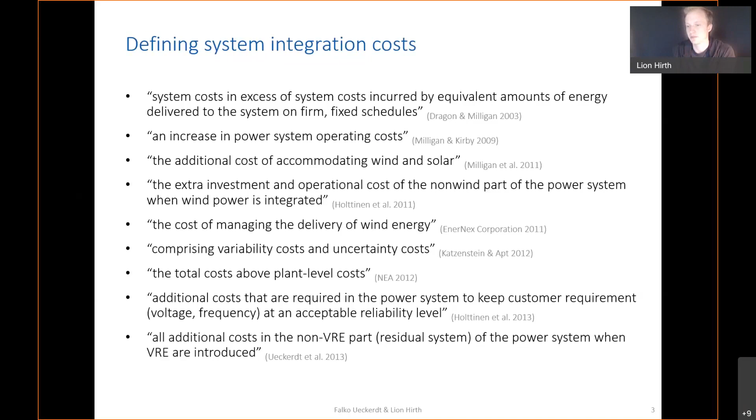So we want to talk you through our view on things. We will start with what we call the value perspective and turn to the cost perspective. We will discuss the equivalence of both, and then focus on something we've spent quite some time thinking about, a phenomena that we call profile cost and the utilization effect, and then generalize that line of thinking and discuss the components of system integration costs. We will close with some recent quantifications and an outlook.

So obviously, for any economic assessment of any generation or consumption technology, you need to know when that asset is running. One way of studying this is what we call the market value, which I define loosely as the average wholesale revenue per megawatt hour. I here think about zonal electricity markets that don't have spatial granularity, in contrast to American LMP markets. So let me define market value as the average revenue per unit of generation.

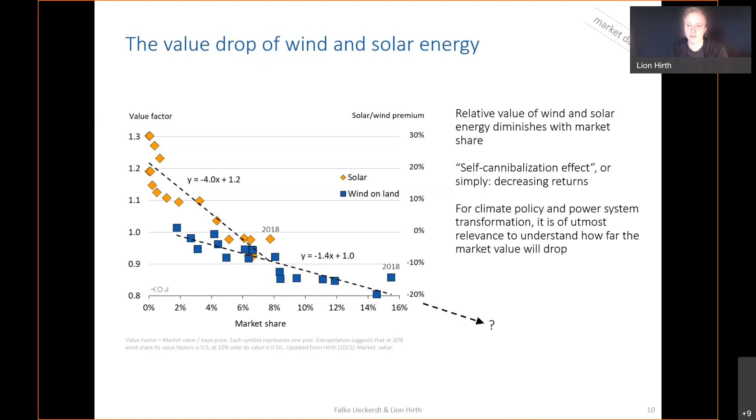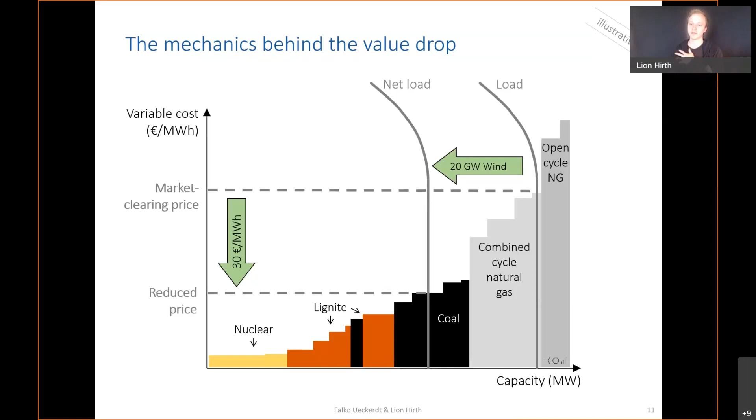So there's nothing magical here. That's simple, very simple demand supply economics. And we are not the only one observing this.

And funny enough - that's coincidence, no magic rule - but I get almost the same number as I got two slides previously looking at German data. So empirically, we find stark patterns here.

But of course, these empirical assessments have limitations. The observed market value is not an underlying fundamental marginal economic value because we're looking at observed data. And real electricity markets are incomplete. Take the German example: we have zonal pricing, meaning network constraints within Germany are not priced. Obviously, that means observed prices do not reflect true economic value.

Also, distribution network constraints are almost nowhere priced properly. Externalities are not priced - climate change, local pollution, and many other externalities are underpriced. And real-world electricity markets are often out of equilibrium.

We are undergoing a massive system transformation with huge oversupply across Europe. We have massive business cycles, pandemia, downturns and upturns. So certainly any observed number is not a long-term equilibrium of electricity markets. I just want to put this out as a warning sign because many, including myself, in the past have maybe put too much emphasis on observed data and interpreted this as true underlying economic value.

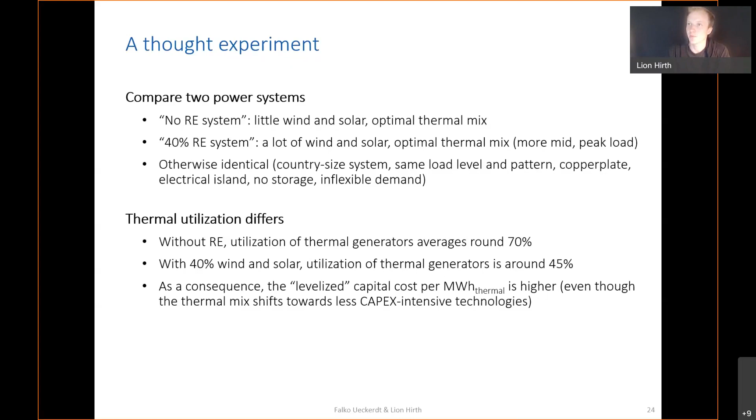Because thermal power stations are costly to build and embody a lot of capital costs, the levelized capital costs—that is, the capital cost per megawatt hour of thermal energy produced—is much higher in the second case. That's true even though there's a shift in the thermal mix: the second case has much less capital intensive gas plants dominating, while the first case has more capital intensive base load plants dominating. But because we use that capital much less, the per megawatt hour capital costs are higher.

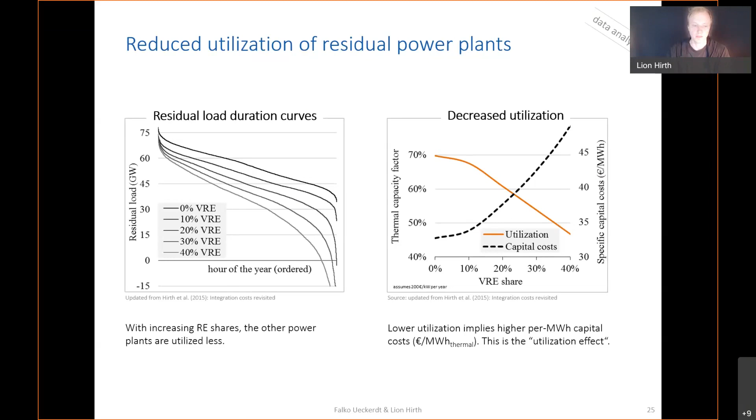As a consequence of this, we define that property, the utilization effect, and from it we define what we call profile costs. We use the term profile costs because it's a result of the time pattern of renewable generation only. This is not about uncertainty, not about forecast errors, not about grid constraints—none of that exists in our thought experiment. It's just that the time pattern of generation, the fact that wind sometimes blows and sun sometimes shines and otherwise does not, causes this effect.

The thermal utilization effect I just mentioned is maybe the least obvious one that matters here. There's a similar effect you might call the renewables utilization effect—that's curtailment as a consequence of oversupply. In times when more electricity is produced by wind and solar than there's demand for, some of that electricity needs to be spilled, and as a consequence, the per megawatt hour costs, the levelized cost of capital for renewable generation, goes up compared to the no-curtailment case.

Finally, there's something you might call the flexibility effect, which has received a lot of attention, in particular from engineering colleagues. That's the cost associated with increased ramping and cycling of thermal plants, so startup costs mostly. Those might tend to go up as well, because a high renewables system will require more cycling and ramping.

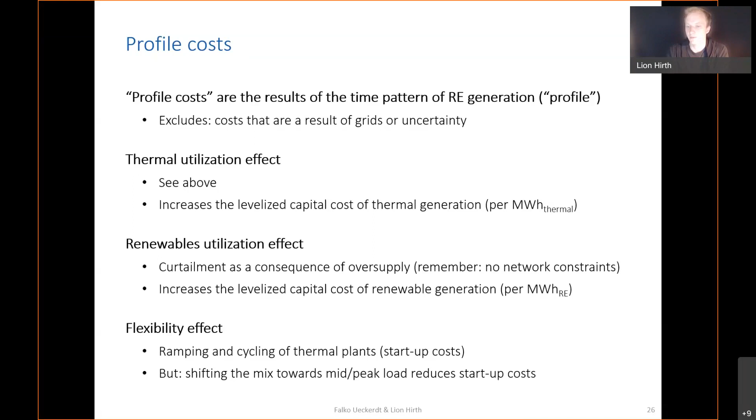But I want to be cautious here, because if we compare two different thermal mixes—of course if you start up a coal plant a lot, that involves startup costs. But if you shift from coal to natural gas as the major fuel in your power system, natural gas-fired power plants have much lower startup costs. So overall, it could well be that the flexibility effect yields a negative sign in the end. That depends on the precise parameterization here.

Let's take a step further and try to do something holistic and comprehensive regarding the different cost components of integration costs. I want to start with a few fundamental, but maybe also abstract, notations here—and you'll realize I'm an economist by training when I do so.

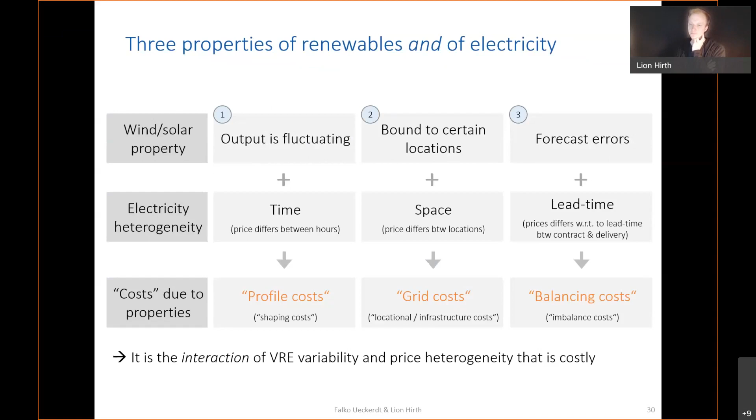I put up this slide just to emphasize one more notion: it's the combination of the properties of renewables and the properties of the power system that causes these costs. It's neither one nor the other alone - it's only the interaction between those two.

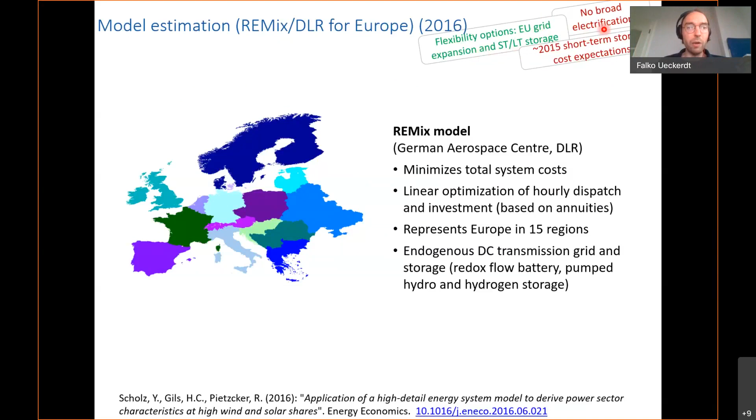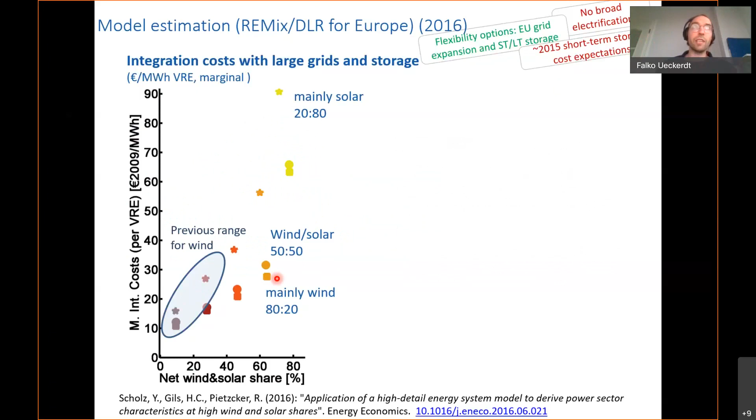A bit later, this is a model estimation with the REMix model of the DLR. They already consider flexibility options like large-scale EU grid expansion or short-term and long-term storage. However, there was no broad electrification yet, and the short-term battery cost expectations were from 2015. They already show that compared to our previous range, the model analysis gives much lower integration costs. However, for solar-dominated worlds in Europe, integration costs can become very high due to the seasonal mismatch of solar and demand.

Also confirm that profile costs are the biggest component.

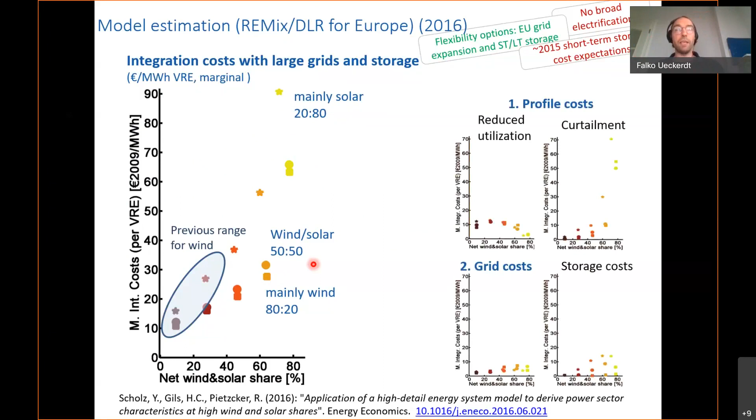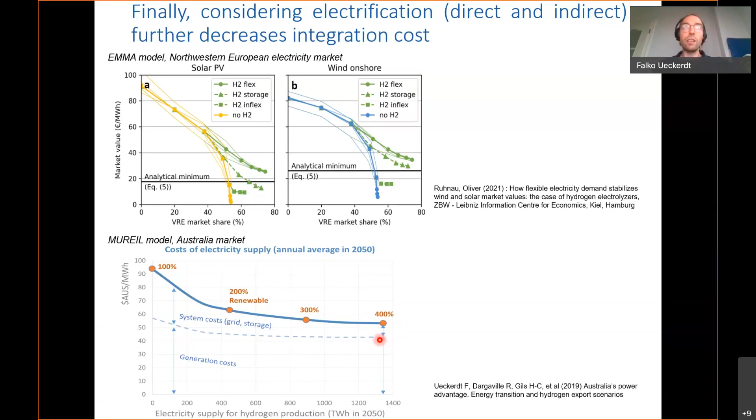So if I carefully conclude, I would say that in combination, flexibility options of all kinds and CO2 pricing will likely stabilize market values and integration costs, such that there are no showstoppers to very high wind and solar shares. With this, I point you to the core four papers, which are the conceptual core. Thank you very much for your attention.

Thank you, Lion and Falko, for the very interesting talk. I think you gave a very clear elaboration on the value and the cost perspective and their equivalence. It's also always interesting to get some quantification, in this case for wind and solar PV.

So let us move to our second presentation, where we will focus on the work carried out at NREL, also connected to IEA Wind Task 25. We regret that Michael Milligan was not able to join, but we are very pleased to have Juha Kiviluoma with us, who was also heavily involved in these approaches. Juha is a principal scientist at VTT, the Technical Research Center of Finland, and is also part-time senior energy systems researcher at University College Dublin. He has wide-ranging interests in electrification of energy, flexibility, energy systems planning and operation, as well as tool and method development. Juha will present some of the NREL work on the subject, more specifically on system cost and the aspect of cost causation. So Juha, you have the floor.

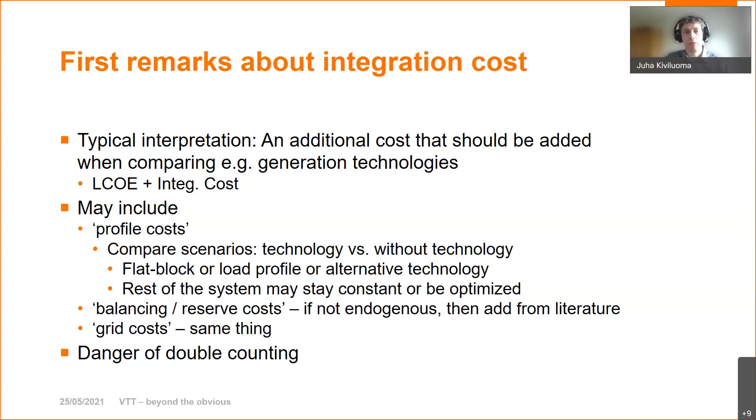There is a danger of double counting across these different categories, and there's lots of discussion about that as well, but I just don't want to go there in this presentation. I want to focus on a couple of key points I want to make. So let's go towards those.

First, I have a very simple case study. The first slides are without investments. It's a system with power and heat. Both are a single node. I'm looking only at profile cost because that's sufficient to make the points. I'm looking at the operational costs of different scenario runs.

And so what I'm comparing against is a flat block generator with zero operational costs. I did this using IRENA FlexTool. It's quite fast to do something like this using this tool. And of course, reminding that the absolute values I'm presenting here are not really the relevant ones. They are driven by the assumptions as always, and here the assumptions are rather simple and just serving the purpose of making the points.

So in the base scenario, there is 10 terawatt hours of electricity and the same amount of heat loads. There are only a couple of different power plants: condensing coal, a gas engine, wind, PV. Then for the further cases, there's batteries, but not in the base case. There's an oil boiler and heat pump.

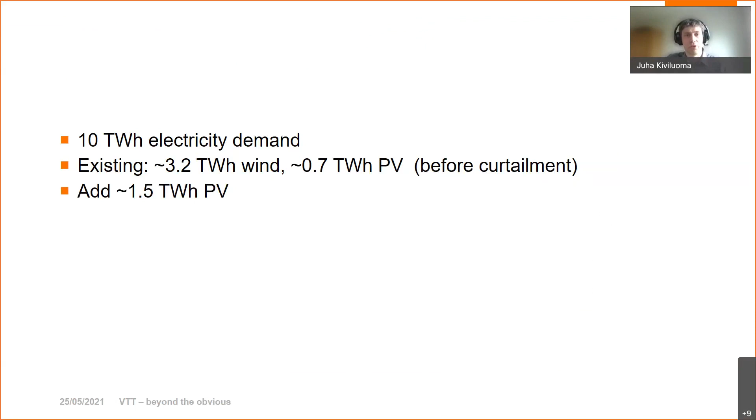So we have that 10 terawatt hour demand, and then I have an existing 3.2 terawatt hours of wind and 0.7 terawatt hours of PV. These are before curtailments, and then I'm first adding a little bit of PV, 1.5 terawatt hours, or 15% of the whole load, maybe not so little. What I see, if there is no battery in the system, is that the PV profile cost is still 12.6 euros per megawatt hour against this flat block generator.

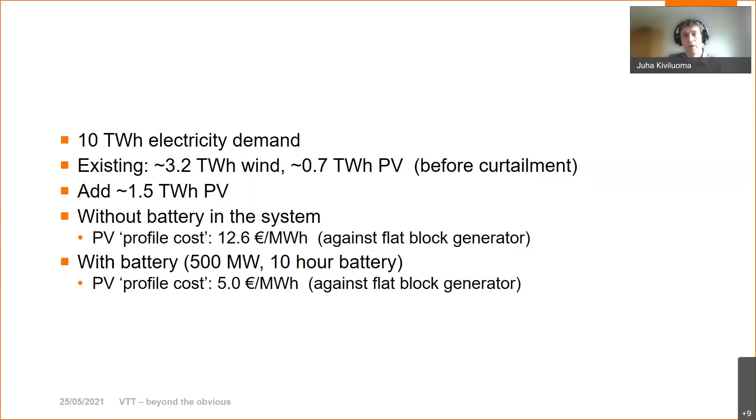When the system has a battery, 5 gigawatt hours of battery, the profile cost goes down to 5 euros per megawatt hour. So, of course, the first point about this is that the integration cost is system dependent. I don't think this is a surprise to anyone, but we have to bear that in mind, that it's a value that shouldn't be taken out of context because it is very sensitive to the system you're looking at.

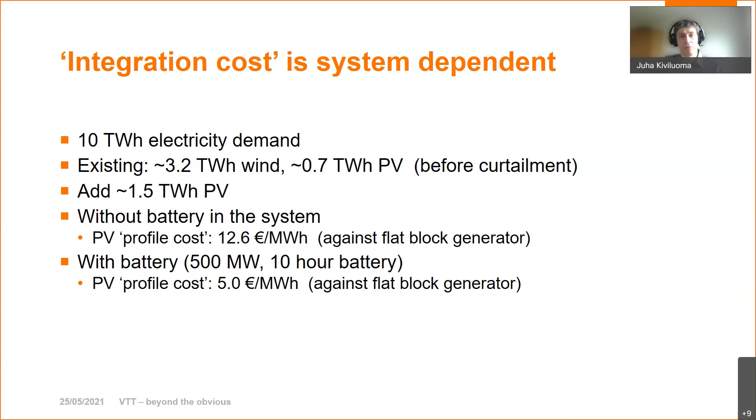Then moving onward, and maybe laboring this point a bit further, there is a system A here. It's the same one we started with last time, and it's about 38% VRE. Then we move to the next system by adding 1.5 of wind, and we see an integration cost of 1.7 euros per megawatt hour. From here, we add also PV, the same amount, and the PV sees an integration cost of 11.4.

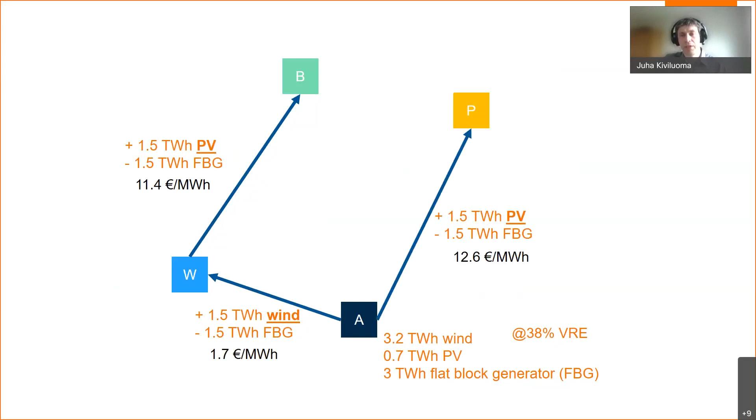However, if we take another route, going again from A, but now this time to the P system where there is PV directly, we see an integration cost that is different for the PV in this case. Same for wind, and this is even more so if you look at the relative values of the integration cost of wind in these two different tracks leading to the same point. We see more than 3 times difference in integration cost. Of course, in absolute terms those are pretty small, but this is just trying to make the point that it depends on which one you think came first. And this starts to get into some of the trouble I want to highlight.

Yeah, this ends up as 64% VRE when considering also curtailments.

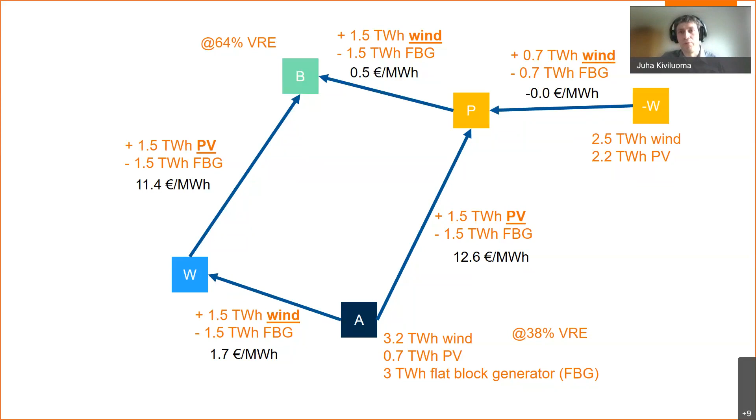Then just maybe the point that was already made by a previous presentation, but when we add wind, it can sometimes be that - or whatever generation - but in this case, wind has a slightly negative integration cost when going from this minus-W system to the P system. And then also another point is that even though the PV integration costs were very high here, we can also see that they are not necessarily high. If we start from 0 and go to 0.7 terawatt hours of PV, then the integration cost is not very high, and that's of course because there is more value here in Finland. But as you go to higher penetrations, the value of PV gets into trouble because of the poor correlation with load.

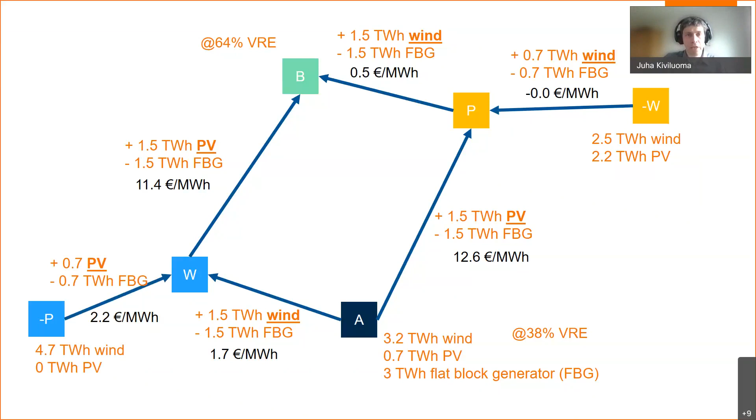So going a bit further again, now I have a system AB that has not just wind and PV, but also this battery, and I add wind to that system, and I see a relatively small integration cost. The battery has flexibility and helps in wind integration, and there is a small integration cost there, or so-called integration cost.

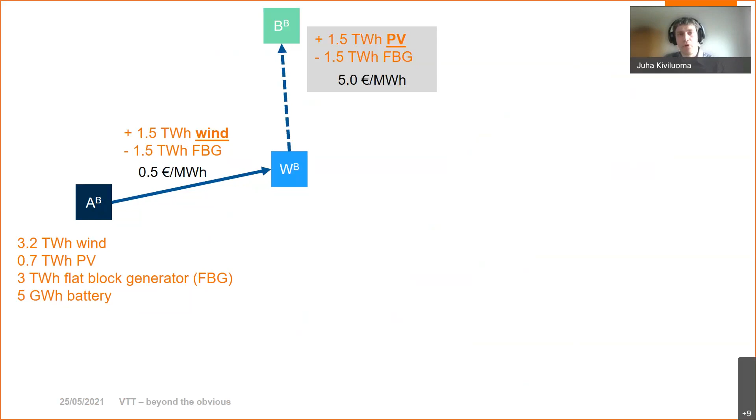But when I add PV to this system with battery, even though we are already at quite high levels of VRE, the integration or profile cost - sorry, I'm using them rather interchangeably - but anyway, it's €5 per megawatt hour in this case. But what happens if this WB system changes? Let's say the battery catches fire and it's no more. There is an overall increase in the system costs because of this.

But what if we now add PV to this system? Then we see that the PV in this case has an integration cost of 13.4, which is way higher than that 5. And I just have a hard time attributing this change to PV because it was the system that changed. So I'm trying to get to the point where I can say that there is an attribution problem.

Who is to blame for these so-called integration costs? Should it maybe be instead of that PV, that the wind was just built before? Or maybe it should just be the next plant you happen to build. What if it's a 5 kilowatt PV plant? Then it will have a rather high integration cost if you attribute it to that. Or should it be attributed to the load? Because in this system, if it happened to be very variable and the battery was kind of thought to be built to mitigate against the load variability - of course, we know that's not the case. The battery goes there because the system benefits from it.

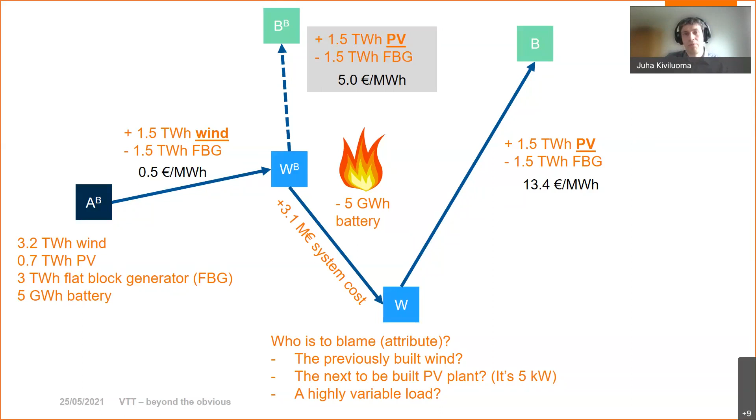So I'm trying to say that this is a system of dependencies, and there is no way to fairly attribute who is to blame for what. These changes accrue over time, and even if you do a marginal change, the latest change to the system will over time be stacked over by new changes, and it will become very difficult to attribute any cost to that anymore. I am trying to say that it wasn't clear in the first place.

Let's have another case study with investments. So I'm using the previous assumptions. This time I'm forcing a certain amount of VRE into the system after curtailments, so really building that much, that you get that much generation from it.

And the integration cost this time is a bit different. It's the total system cost before and after, so the difference from when increasing the VRE, we can see how the cost changes, the total system cost. There is 10 terawatt hours electricity and same heat still.

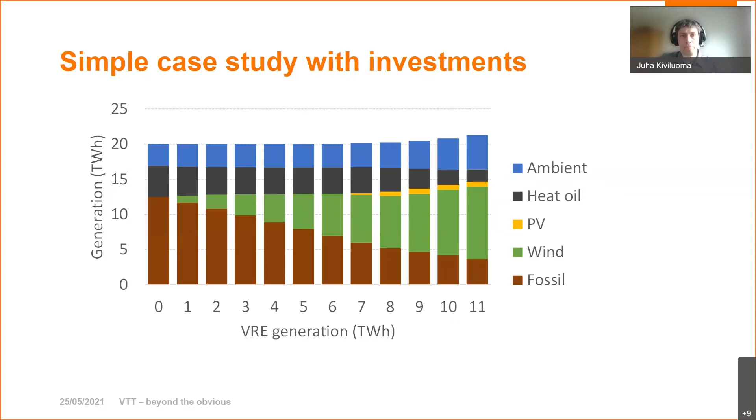So that's nice, fun fact.

Let's then take the heat sector away, and we see that the total system costs when we are forcing the VRE to produce all the way up to the full 10 terawatt hours that there is electricity demand, there are huge costs in integrating that to the system. We are kind of saying that you can't produce anymore with fossil in the last point in the graph, and therefore you need to do it all with wind, PV, and batteries, and that's of course very expensive, and you see that happening here.

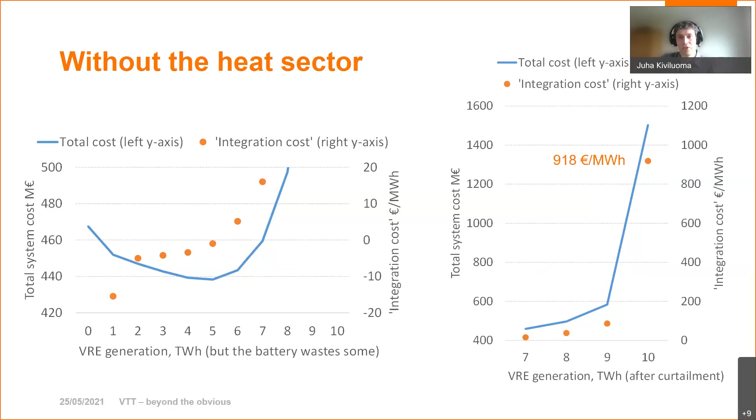I guess what I'm trying to say here is it's the same point, that it's the system that matters, and your assumptions about the system boundaries are going to be very, very important when considering whether you use integration cost or not.

Another point is when you change the CO2 cost, which in the base case was 20, going up to 50, you see how the optimal point goes from 7 terawatt hours closer to 9, and also the integration costs drop consequently. So the system matters again.

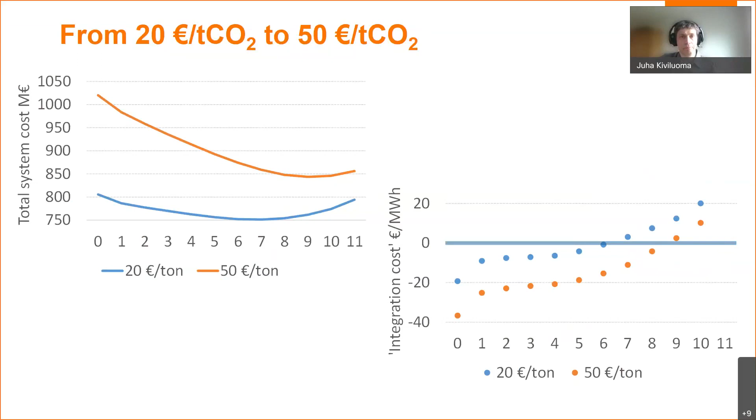So what I really want to say here is that certainly I'm not trying to say that variable power generation doesn't cause challenges to the system and its value to the system wouldn't decrease. Of course it does, but I'm just trying to say that it's not productive to try to calculate that. Maybe that's too harsh a way to say it, but I guess I'm trying to defend the position here.

I think it's more productive to talk about the total system cost and use that as a measure. I think it's much less misleading, because when you're reading about those results, you can immediately see that it's the whole system that matters, and you can direct your attention to ways you could find solutions to decrease those total system costs and achieve your objectives with least cost. I also think it's easier to discuss assumptions and methodologies, and to focus the discussion on those things rather than on how you calculated the integration cost.

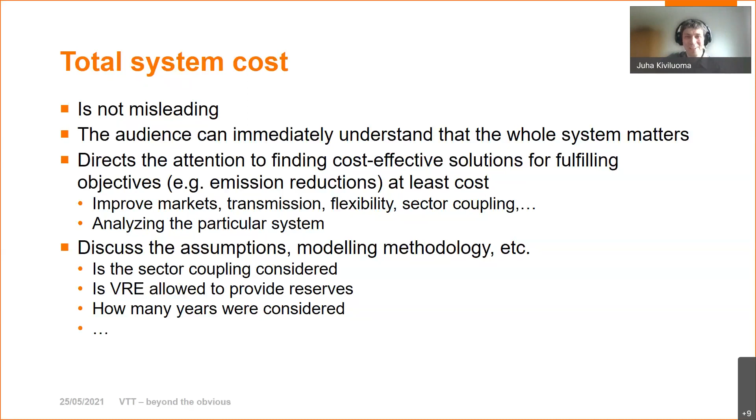So still, that said, there are some costs that are not always covered by the modeling methods in use. There can be ancillary service balancing costs, especially within the periods that the model covers, grid costs and so forth, and those should of course be included in the modeling as much as possible. If they are not somehow included, then try to at least be conscious of them and present the results by saying that those are not included. The same goes for the system boundaries, what you've considered and what you haven't.

Then a point about LCOE, I find it difficult because it of course depends on the full load hours you actually get. This is especially true for thermal. Therefore I see it also as kind of a system property. I know there was already a presentation on how you can try to piece them apart, but I still kind of think this is maybe my point of view on that topic.

And the same is true with market price evaluation, especially when you're looking only at the short term. I think in the previous presentation there was quite a lot of talk about long-term market value, which is a different thing. But if you're looking at short-term, you don't have any information about the investment cost in those prices. It's of course very important for an investor to evaluate those, but when thinking about the optimal system to decrease emissions, I don't find it so interesting.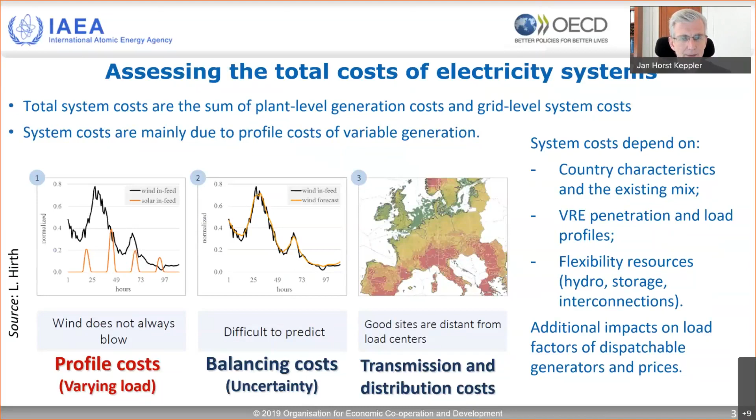And you have the system costs increase. Perhaps that slide also gives you a feel for there being some system management issues, some technical issues in the working of the system. We have not really mentioned them yet today. We have not modeled them.

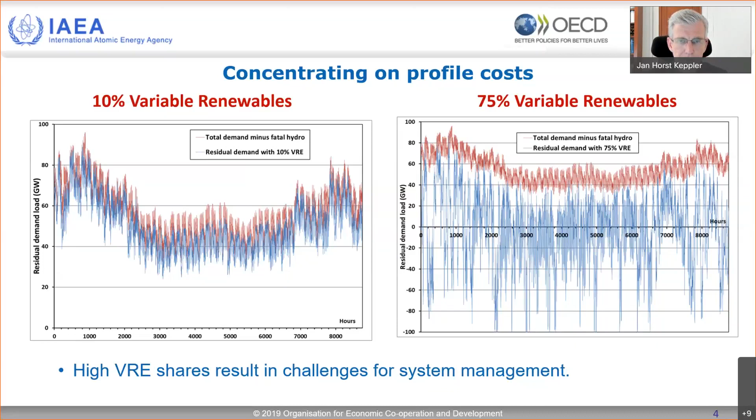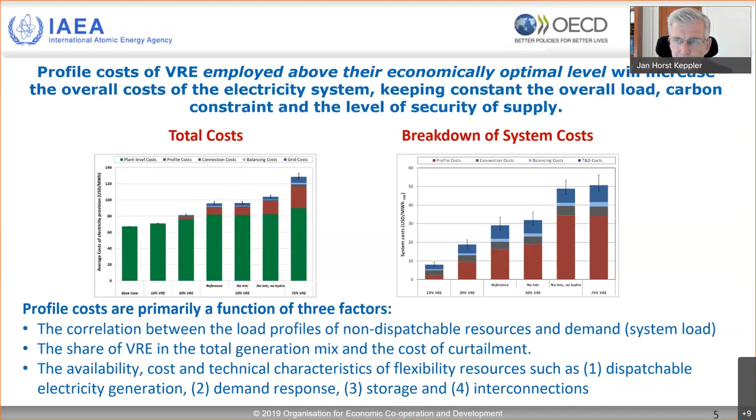Yes, and I should have said it's also a function of the carbon target.

System costs are very different whether you're looking at a system with 50 grams per kilowatt hour, which is already a very nicely decarbonized system, whereas in Europe we're currently between 300 and 400 grams per kilowatt hour. So getting it down to 50 grams per kilowatt hour in the European context would be a great success. It's roughly the level of a country like France, with its high share of nuclear, but you also have other low carbon energy systems such as Norway with its hydroelectricity sources. So 50 grams is already very ambitious.

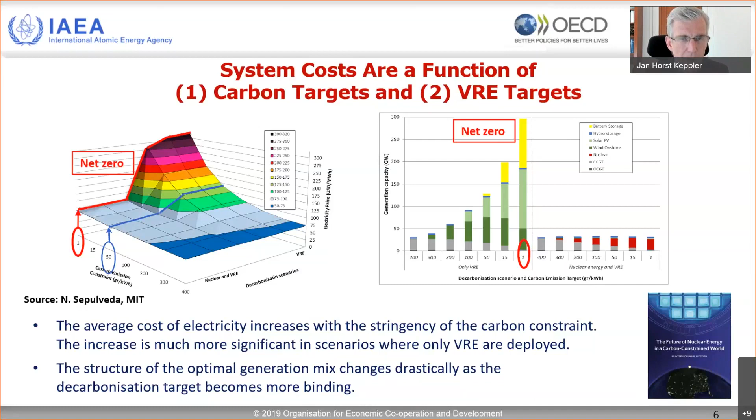You see it also in the right-hand graph. The column there in the middle corresponds to the same 1 gram per kilowatt hour. Again, you see how far the costs rise for a low carbon target and a high renewables target. So that combination, for us who are in the business of giving advice to policymakers or providing information to policymakers, is a very important message.

Autocorrelation effect, because all the wind turbines produce during a limited number of hours, where they then push down the prices. All the solar panels here in Europe produce between 10 o'clock in the morning and 3 o'clock in the afternoon. So again, during those hours, prices tend to be low, and that's why their market value will be lower.

However, what really interests us, again in the spirit of providing a message to policymakers, is what happens in an optimized system, in which basically you have free exit and entry, no policy interventions, basically a smooth model.

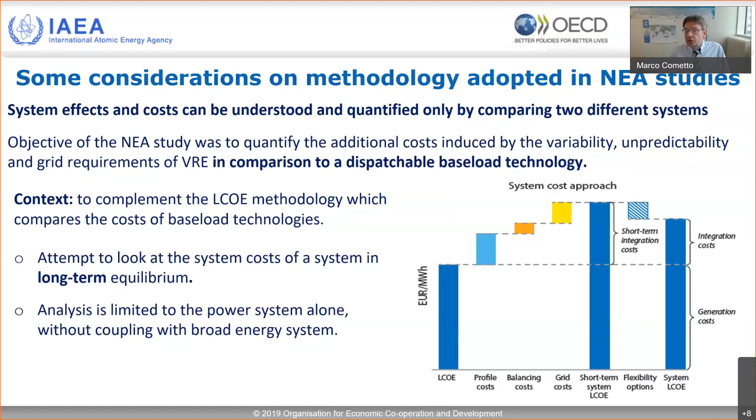And also a caveat: the analysis that we have performed is limited to the power system alone. We didn't couple it with the broader energy sector, with the broader energy system. This became a little bit trendy after we began the study. I would say just that, of course, having a bigger or more combined energy system would definitely make the modeling and interpretation of results more difficult. But in our view, in principle, the same methodology could be adopted even for a more complicated system.

So here, just to give you a few indications of what we have done. First of all, we all know that a complete modeling of the power system is an extremely complex and computationally intensive undertaking, and so far there is no model that can fully represent a power system from the investment to the operation time over such a long time frame. Clearly, each system, each model has its own limitations, and we have to live with that and recognize it.

The data are real data from 2015, the year in which we started this study. Also, as mentioned by Jan, most of the economic assumptions were derived from the previous version, the 2015 version of the projected cost study, which to a certain extent was penalizing variable renewables, assuming higher costs for variable renewables compared to today's cost, and also had conservative assumptions on storage and demand side management.

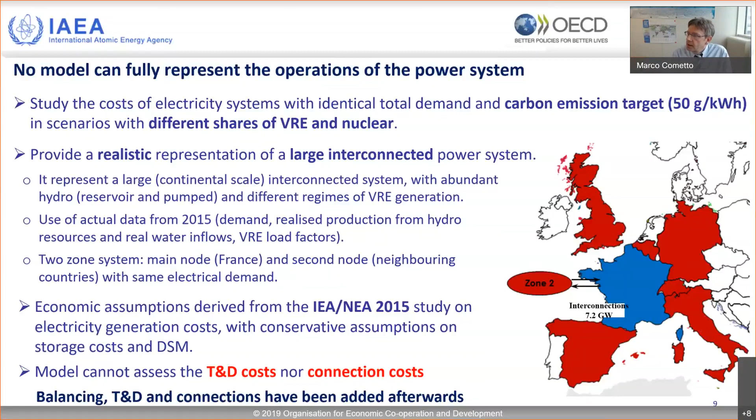As mentioned before, we have 6 main scenarios in which different shares of variable renewables are imposed exogenously into the system. What is really important for us is that all scenarios have the same assumptions in terms of power demand, characteristics of technologies, availability, cost, carbon, and all other constraints. Basically, the only thing that changes is the amount of variable renewables in the system, because this is what we want to observe.

To be more clear, the base case here has only dispatchable technology because it is our baseline for comparison. The other cases have 10, 30, 50, and 75% of variable renewables net generation, including or excluding the curtailment.

It's also important to say that all scenarios represent an optimum, so these are the scenarios which lead to the least cost in the long term. Again, we have taken this greenfield approach with an implicit long-term perspective. Basically, each of those calculations provides us with a least cost for the system, and really the objective of the analysis is to extract system cost from these results.

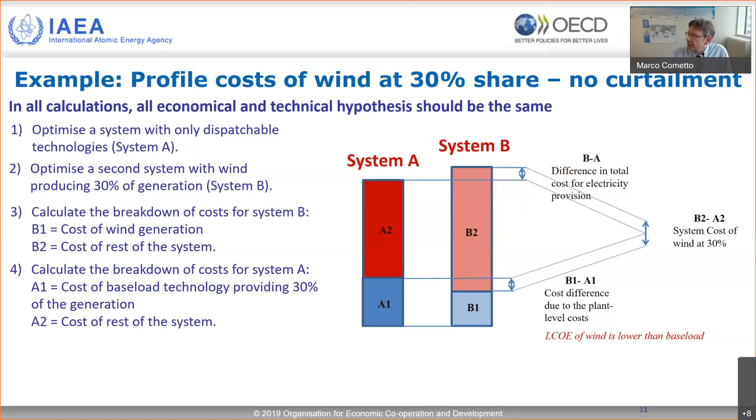So B1 minus A1 is the cost difference due to the plant-level cost. In this case, the LCOE of wind is lower than baseload, so it drives lower cost there. And finally, the difference between B2 minus A2 is really what we have in terms of system cost of wind at that level of penetration.

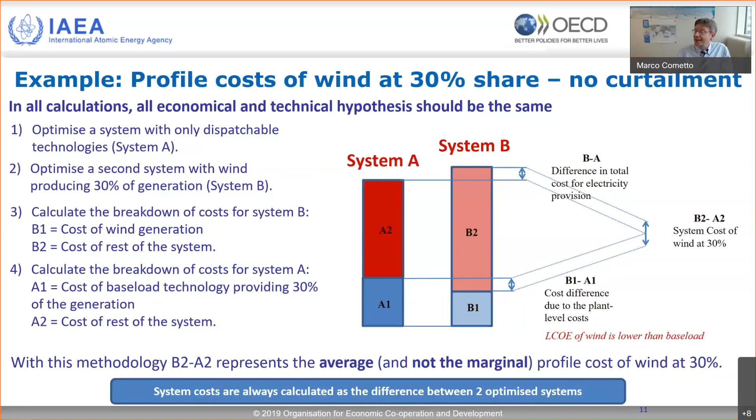It's important to say something about marginality or not. Calculated in that way, what we obtain, B2 minus A2, represents the average profile cost of wind at 30% penetration share, generation share, and not the marginal cost.

One other interesting property of this methodology: imagine wind has a higher LCOE than baseload, then in your system B star, the total cost will be higher because wind becomes more expensive. But what's interesting is that the profile cost of wind doesn't depend on the LCOE, only on its generation share and other system characteristics.

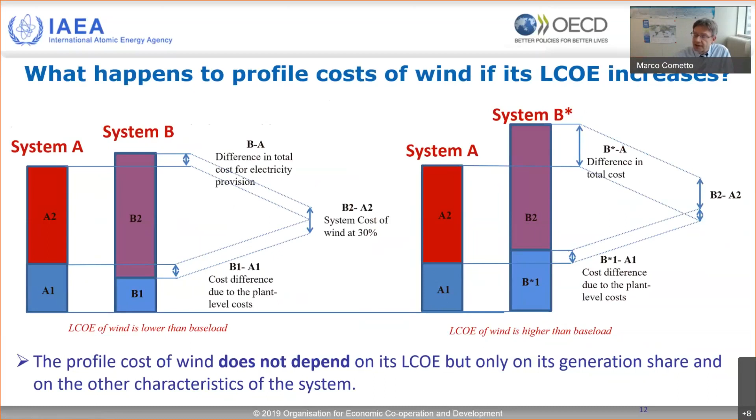Maybe I can skip this slide since we're running a bit out of time, but perhaps we can look at it next time in November, how to treat curtailment, because curtailment is important and has an impact on system effect. So I'll come back to the slide that Jan was already presenting.

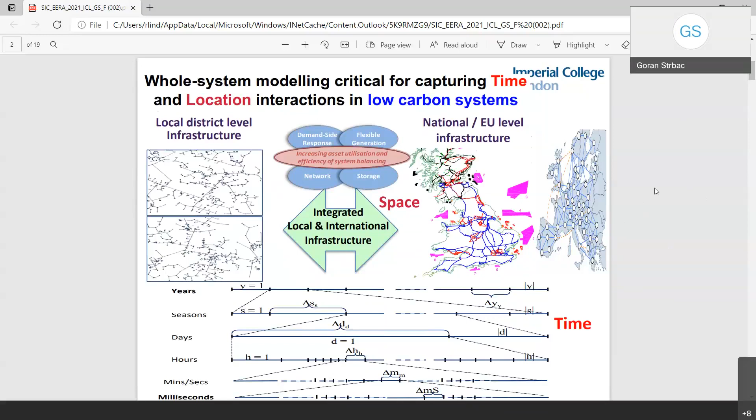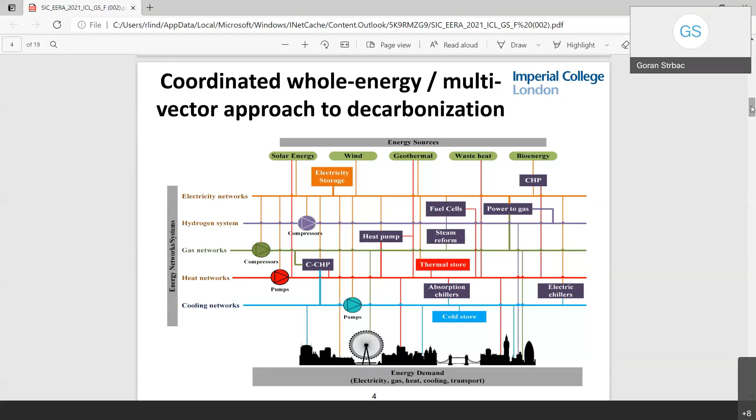You've got electricity, hydrogen, gas, heat, cooling, and so forth. The interaction between them is very important, because that brings flexibility inherent across different energy vectors. The next slide shows a case study, again in the UK, about decarbonization of the heat sector and electricity sector. On the left-hand side, let's focus on the 50 grams case, showing what we've done: we compared solutions when we ignore the interaction, and then when we account for it, and look at the difference in cost and what the savings are if you do it in a coordinated fashion.

This is just showing that, for example, below zero means something we spend more money on, and on top is where the savings were. So the modeling demonstrated that in some areas in the UK it would be good to put in district heating systems, although given the assumptions they were more expensive than having internal hybrid heat pumps and so forth.

But given the ability of district heating systems to provide flexibility, there was also a significant amount of thermal storage, which was hot water, relatively cheap, but it can also support national-level balancing of the entire system.

On the right-hand side, we see the savings in the building-level, home heat pump district approach. There's also a reduction in the overall operating cost of generation, a reduction in the cost of reinforcing distribution networks, and a reduction in investment in low carbon generation, as mentioned earlier. So the benefit is about 6 billion, but it's worthwhile doing that.

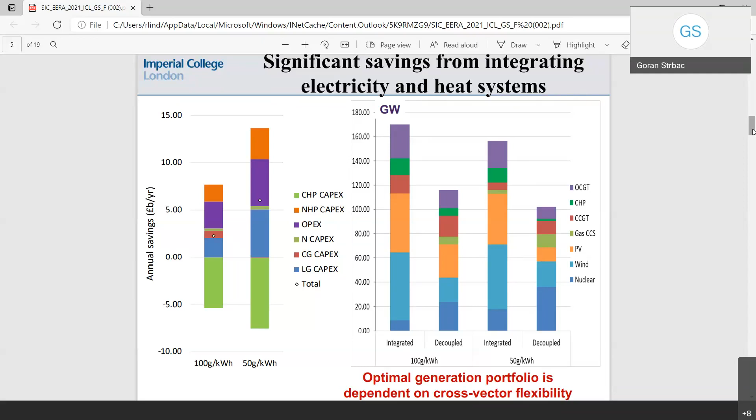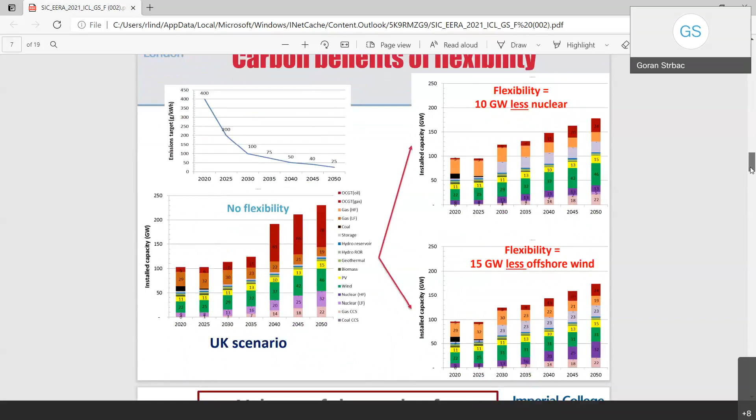Let's move further on, because this will get complicated given the time. This next one is just to show one of the critically important benefits of flexibility.

Looking at the UK case, the top is a diagram showing how carbon emissions need to reduce. At the bottom is the generation portfolio with no flexibility. But one of the core messages is that if you have flexibility, we can achieve the same carbon target by 2050 by building 10 gigawatts less nuclear and 15 gigawatts less offshore wind. That's the important aspect, and it's something which hasn't yet been taken into account regarding flexibility in facilitating a cost-effective transition to a low carbon system.

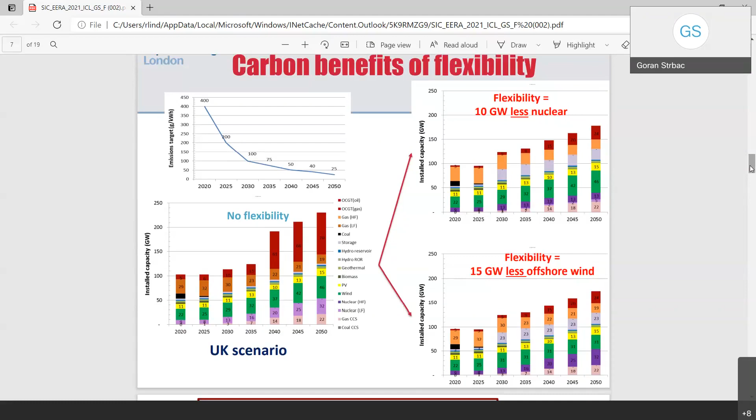The next one shows where the value is for the UK case, showing that flexibility has about £8 billion per year in savings. The blue is the OPEX, then we have reduced distribution network reinforcement, also transmission reinforcement. But the big one, the red one, is the reduction in investment in low carbon generation, meaning less wind, less CCS, and less nuclear while still meeting the carbon target.

One of the core aspects now getting on the agenda in the UK, but also in other parts of the world, is how we're going to align market design with the low carbon agenda, because currently these flexibility resources cannot access the benefits associated with reducing investment in low carbon generation.

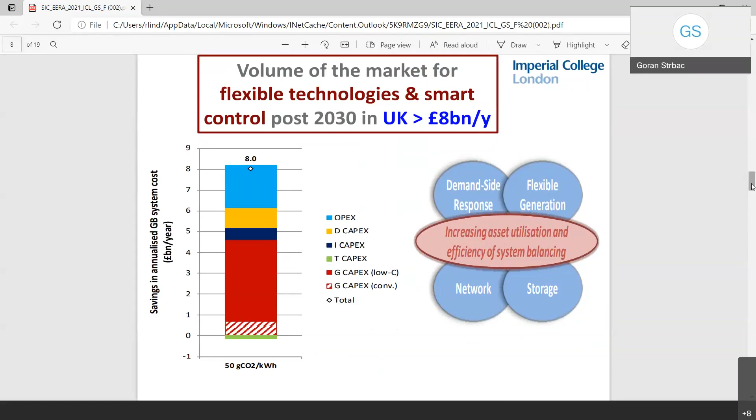That is something which is now growing on the agenda. The next slide is just showing what was discussed already regarding the system integration costs, and we will go into the details.

The whole system cost is equal to levelized cost of energy plus system integration costs. The system integration cost component, shown here in green, includes balancing cost, network reinforcements, increased backup capacity, but also cost of maintaining system carbon emissions, which is one of the very important aspects of this analysis.

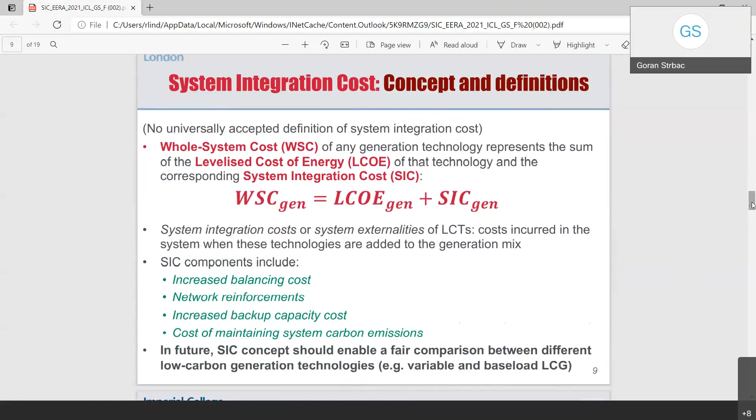Given the discussions in the UK, the next slide shows the discussion with industry and policymakers, trying to see how we can compare, for example, cost of nuclear versus cost of wind. Although the cost of wind is lower, the system integration cost could in fact be higher. So how do you compare that? This is where the system integration costs, which Leon and other colleagues mentioned already, come in.

This is just examples of what was done in the UK. The first one, method one, is predefined replacement. What we do here is remove a certain amount of capacity of nuclear and add renewables with the same energy which nuclear removed, but maintaining the carbon level, so it would add, for example, carbon capture and storage.

Method two was to remove nuclear but then optimize the entire system. Method three was to try to find out the marginal benefits of each of these individual technologies, and then compare them by finding the difference between them.

And this is what we have done in this analysis. Obviously there are reports and so forth on this. This was again trying to compare, in relative terms, nuclear with other forms of generation.

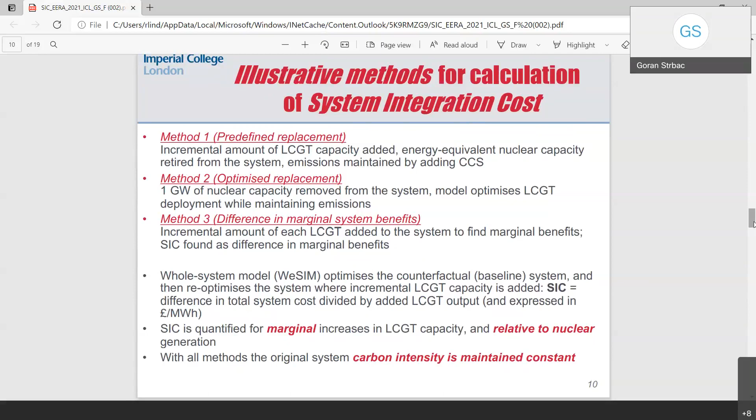As an example, in a 50-gram scenario, the next slide shows the comparison. We won't go into full detail, but this is comparing the system integration cost of wind compared to nuclear for this particular scenario with the carbon target. The three methods are shown at the bottom, and these are the figures which come out from this analysis.

Of course, there is no particular agreement on this, but at a high level, you can see that there is a system integration cost of renewables, both wind and solar.

The core aspect is when we remove nuclear and put in wind, we would then need investment in CCS to maintain things because of the balancing issues. That would also lead to operating costs, and you would also need the peaking plant to make this work. But at a high level, these numbers, while not the same, are not hugely different.

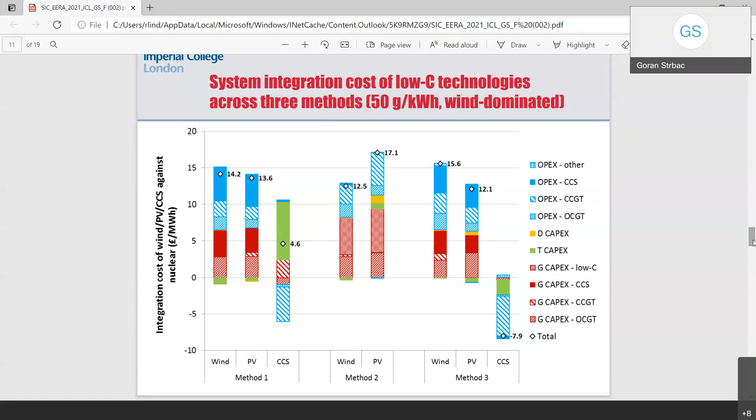Again, the key point is that when you replace nuclear with, say, wind, you need to invest more in other low carbon generation. Given that the definition includes CCS, there will be more investment in low carbon generation. The next slide shows a system that's much more PV dominated.

The next slide highlights the system integration costs — the whole system cost is levelized cost plus system integration costs. The diagram shows the penetration level of wind on one axis versus the additional system integration costs on the other, showing how you can compare them.

One of the aspects here is where is the market design which would make this happen automatically, rather than policymakers doing this. Where we think the core development needs to be is a market design which will be aligned with the low carbon agenda.

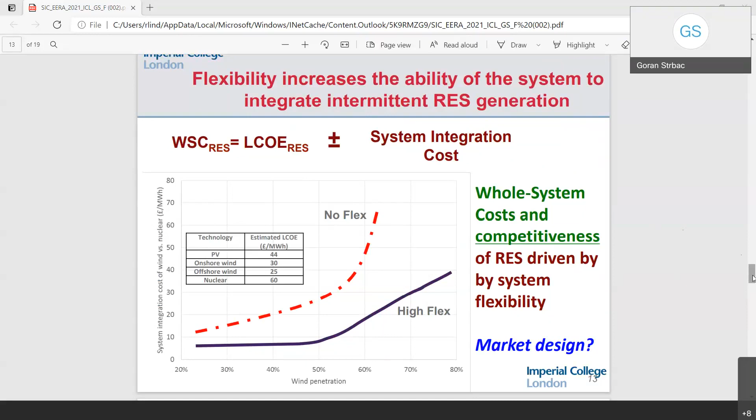Just to show the next slide, to illustrate without going into details, is the integration across different energy vectors. This is a scenario in the UK which has electricity, transport, hydrogen and heat sectors together.

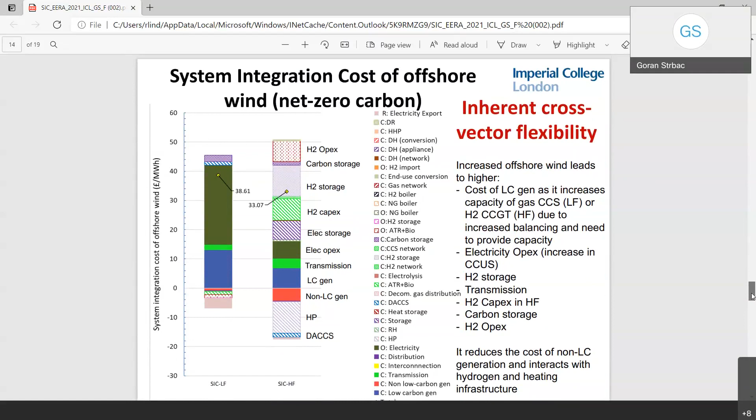We demonstrate that if you have flexibility in the system, the system integration cost of wind would be 38 pounds per megawatt hour, showing that in this scenario, whether you choose to build more nuclear or wind is in broad terms the same. But this inherent cross-vector flexibility is critically important for moving this forward.